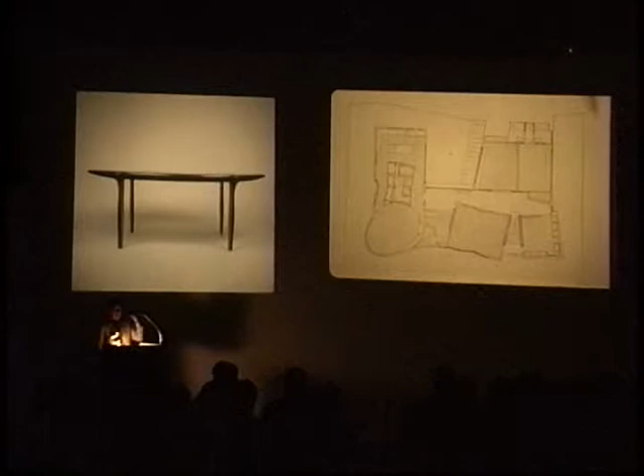All right, now this idea of seamlessness is something that we have also tested at the scale of a building. In this case, a house for a couple who wanted to retire in Bilbao, in Spain. And we have to thank Frank Gehry for allowing the clients to have a more open mind as to what a building should look like.

In this case, we played first with the idea of dissecting through the building, since we were against a hillside, and actually being able to occupy the top, the roof of the building. At the same time, all of the programs, again, because it was supposed to be a home for retiring, needed to be in a single floor plan.

And what you see on the right-hand side is the floor plan with basically all of the programs. The dining room, which is the oval-shaped room, needed to accommodate a 19th century oval-shaped table. The living room needed to orient itself towards views, and then the library needed to have a requirement for however many books they wanted.

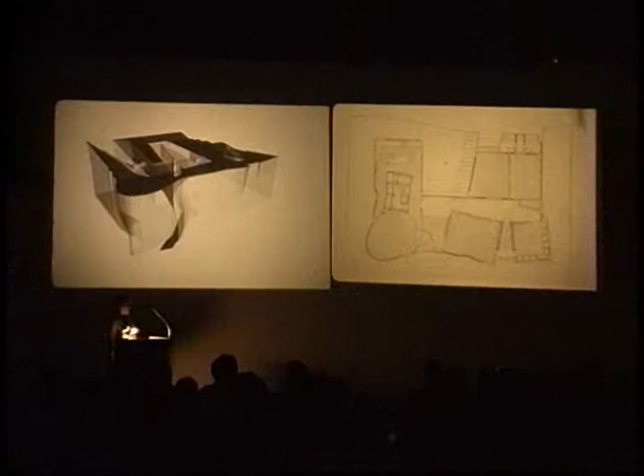So we took each of the requirements as excuses, again, to produce a figural plan that was not cohesive. And in fact, we like to argue that the plan can be read in many ways, as somehow being colliding within the plan.

Now, most importantly, each of these rooms seems to put pressure on the skin of the building, almost as if the building was shrink-wrapped around these rooms. So, for example, the moment in which you need to drain water and have access, a staircase to the roof, has a certain impact on the elevation.

And instead of wood, which is, of course, the sort of conventional, traditional technique, we began to work with laser-cut steel that would make up templates. It would make up shelves for the stone itself. So the jig that will guide the mason for the laying of the stone will become impregnated and embedded within the building.

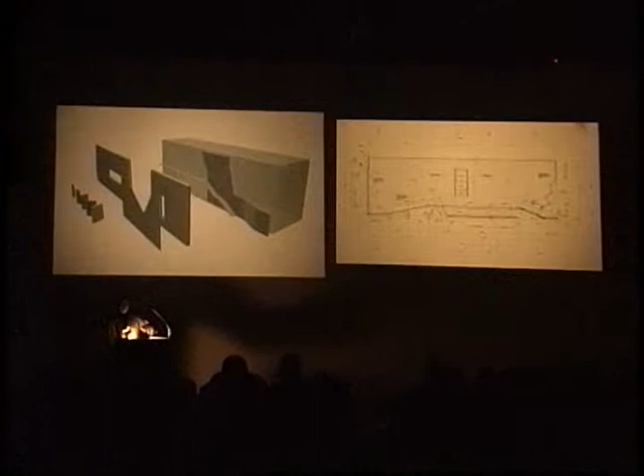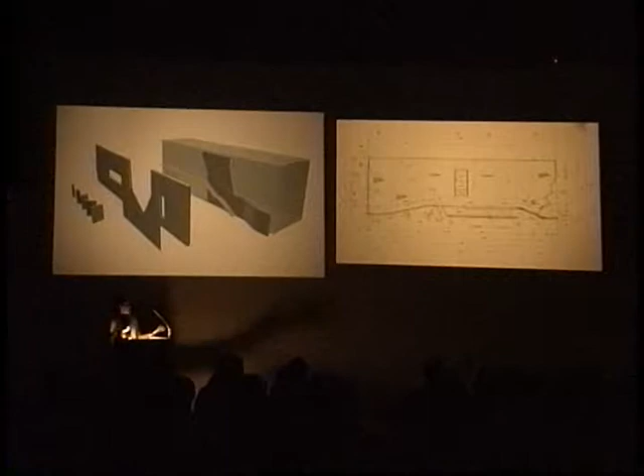For this particular project, we decided not to do the traditional thing that architects do with an end block. Instead of putting the stair on the party wall condition, since we had a very low budget and had to invest money on the staircase, we said, why don't we put the stair on the outside of the building? That way, you put all your eggs into one basket. So what you're looking at is a stair that connects a cafe and a gallery on the ground floor to art studios on the upper floor.

This idea of having the side of the building in an end block condition not behave like a side is nothing new. There are many buildings in cities that decide to treat the side as if it was yet a third front.

In our case, that third front, that staircase, became the moment where we could investigate the possibility of distorting the building. What you're looking at is a skin that somehow becomes imploded, like a sock inside out. It's not clear where the facade begins and where the facade ends.

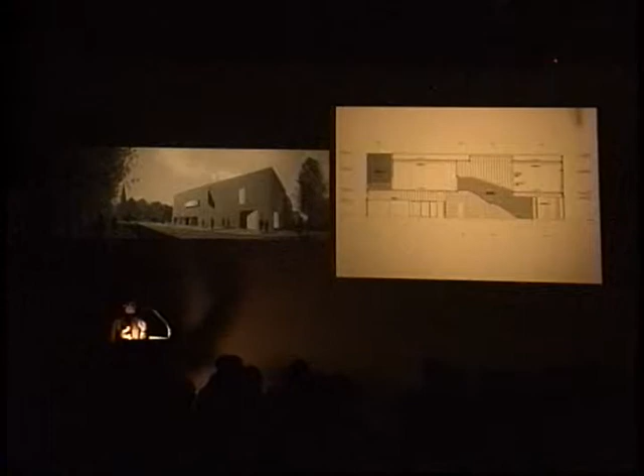At the same time, the stair becomes a directional device, so that as you go up, it points you towards an existing landmark, a church, but as you're going down, it frames the view of a public space, a public park.

This was a very low budget project, so the rest of the building had to be relatively simple. We decided to treat it almost like a warehouse, a two-slab project with a twist, using the excuse of bringing light to the gallery and the cafe to introduce two skylights that penetrated the building. But you also have to bring plumbing through the building up. So these two elements, interpenetrating from the top and from the bottom, became agents for activating the section, in a very modest way.

So the distortion in the elevation, again this moment of the sock turned inside out, was possible by accepting a very conventional method of fabrication, doing metal studs throughout the building, then adapting the metal studs to the moment of the staircase, to the moment of the opening.

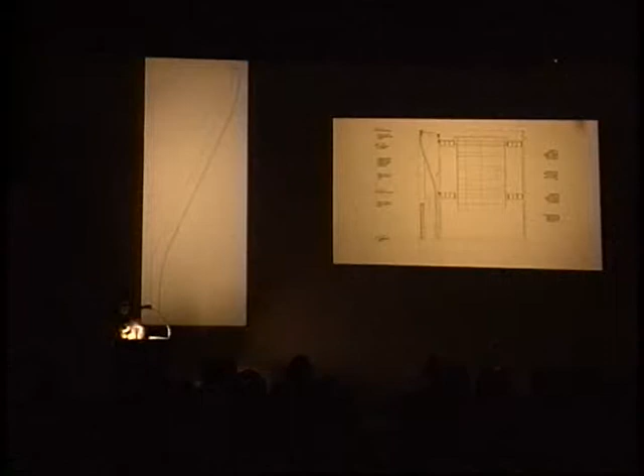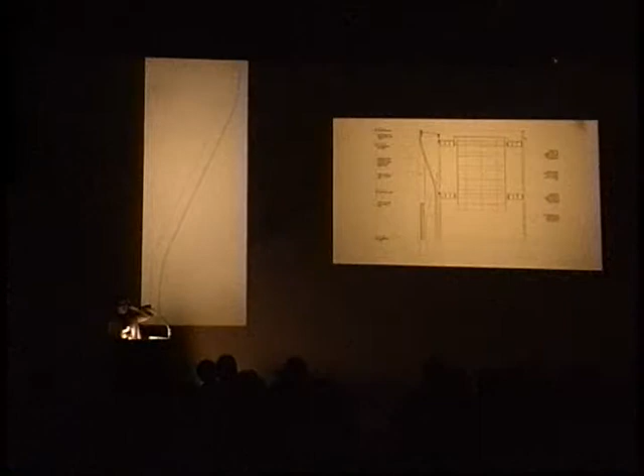What you can see on the left-hand side is actually laser-cut steel fins that get laser-cut with the impression of the brick itself, so that the structure becomes, again, the jig for the placing of the masonry.

We reduced the size of the opening several times to be able to bring it within budget, and we reduced it as much as possible before we would kill the idea. If I could change only the right-hand side—

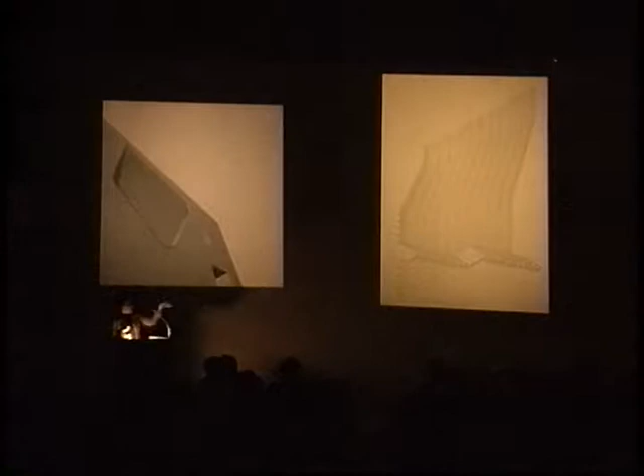Then you place steel angles every third brick, just like you do in conventional construction. Next slide, this is the wall with the brick already placed on top. Next, on the right-hand side.

For the rest of the building, we relied again on very conventional constructional techniques, but we worked with the idea of making the brick seem thinner or thicker, load-bearing or not load-bearing throughout, so that in the same corner you will have a fat wall and a skinny wall sitting on top of each other, so as not to favor one mode of construction or one reading of brick construction over another.

We did the same thing with the fenestration. We're purposely always trying to have as many techniques and as many interpretations overlaid on top of each other.

We got into a discussion in the office about the difference between shrink wrapping and vacuum packing, and I'm not sure that I know the difference still. There are different camps in the office as to what one means versus the other. But in general there's consensus that this is not shrink wrapping, that this is vacuum packing. As it's been explained to me, the difference is that one takes what would otherwise have been wasted space and sucks it out of the building as a means of gaining something else, as opposed to taking figures and then wrapping them with saran wrap.

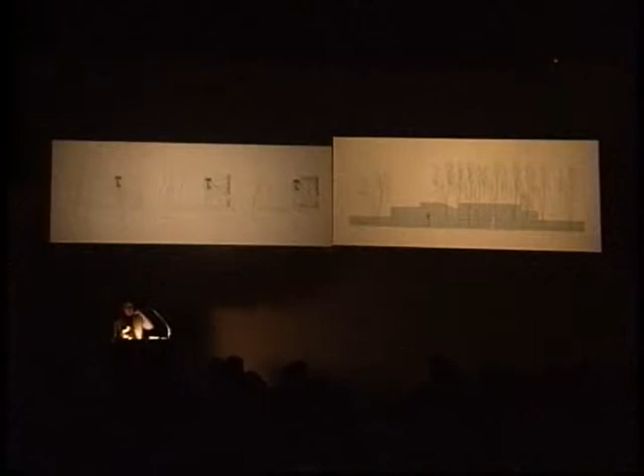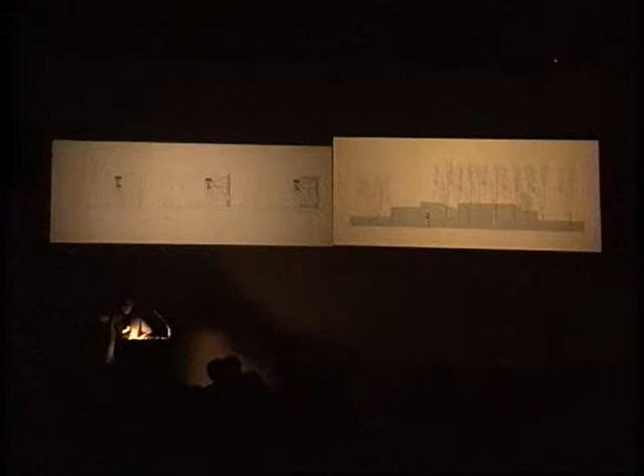Ultimately, the intention of the client is to actually build a series, to add more studios if the project is successful. The idea will be, again, that our building becomes the mothership for all of these studios.

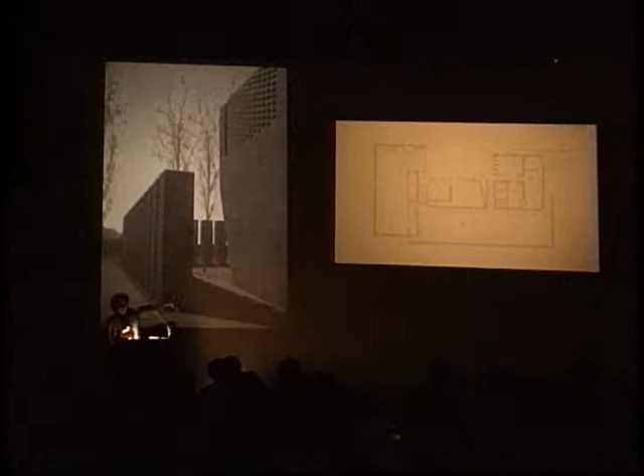I think probably you guys can't read anything in the plan, but we're looking at a long gallery on the left-hand side, and then two artist studios. One of the artist studios has a bedroom on the second floor, and the other artist studio has everything on the same level. On top of the artist studio that is on the ground, there is a caretaker's apartment, and this will become important later.

But in working with organizing the pieces of the project—gallery, two studios, caretaker—we became interested in producing a plan that could be understood as a single building that was chopped up, but also perhaps as three buildings that came together. In fact, the construction documents were drawn as if it was three separate entities, with some drawings that brought it together.

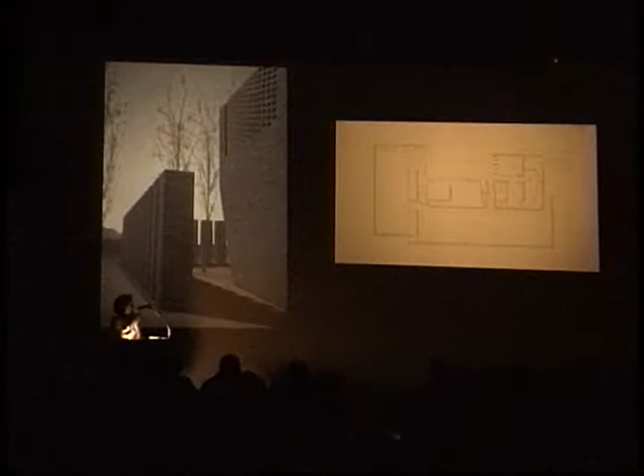Because of these slippages, or this compactness of the elements, the idea of pressing against the building and forcing you to go through the cracks of the building became the motivator for our interest into vacuum packing.

So, for example, as you go through the courtyard and slip into the gallery, the building has to move away in order to allow you to go into the gallery.

In all of these distortions, there was an incredible sort of pragmatic but absurd minimalism, where we would squeeze in any inch that we could in order to gain circulation. So, for example, this is the main access into the courtyard that views towards the forest of trees, and on the right-hand side you can see a stair that takes you to the caretaker's apartment.

You can see how we're distorting the wall as a means of being able to pass through and under the stair. Now, this ambiguity—was this a single building that got split apart, or is this a building where things come together? Could I have focused on the left-hand side? It also has very specific material repercussions.

So as you're going through this crack that connects one garden with the courtyard and the grid of trees, or the forest, we were interested in developing the two walls as if they had once been one, or developing the two walls as if they could one day be one.

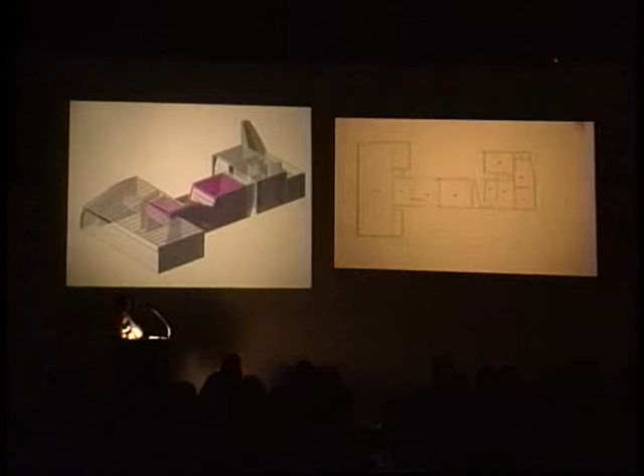On the second floor, we have a bedroom that belongs to one of the studios looking down into the gallery, and we have the caretaker's apartment. This interpenetration in section from one studio to the gallery, the double heights of the studios, there's an intertwining of staircases and volumes that have a relationship and a back and forth with what the envelope of the building is doing.

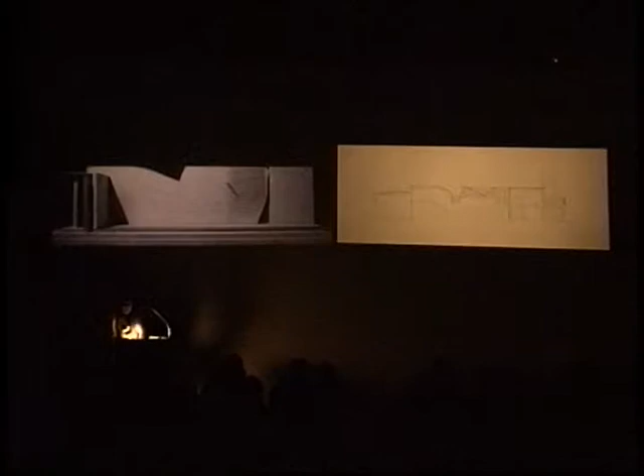So while the skin is trying to contend with passages and movements, the roof has to contend with shedding water, with bringing light into the art studios. And you can see how these things need to be negotiated.

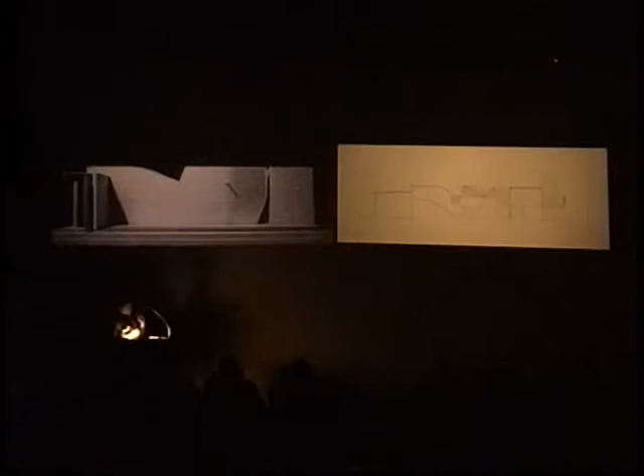So for example, on the slide on the right-hand side, you can see one roof dipping down over the staircase, whereas it dips down to allow light to go through the skylight, whereas the roof over the studio has to dip down in order to shed water.

And again, these moves for us had counterparts in the way that we dealt with the brick coursing itself. On the right-hand side, you can see the negotiation between shedding water of one roof and the light coming through.

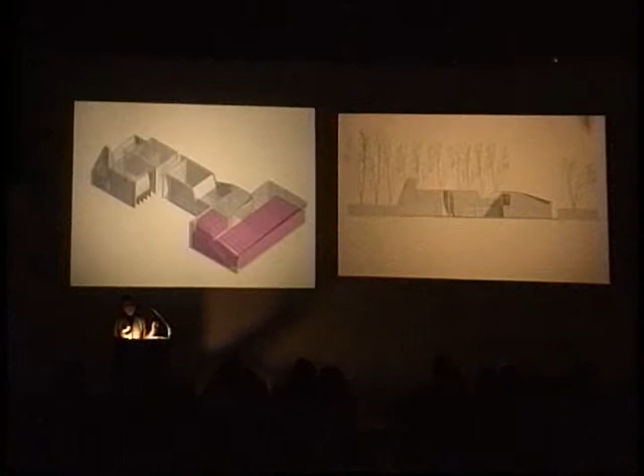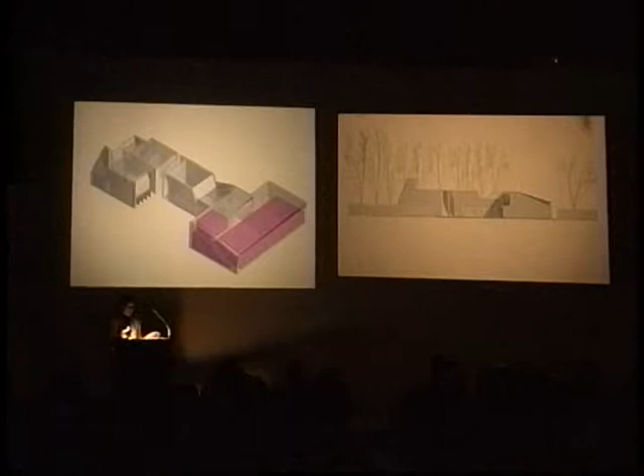The gallery is actually an interesting case study. There is a staircase that connects the gallery to an office on the second floor, which you can see in this diagram. But there is also the problem of bringing light into the gallery itself. So the roof of the gallery, which is at the far right of the elevation, dips down to shed water, and it gives the gallery almost its object quality.

But at the same time, the roof has to lift up in order to allow as much light as possible within the gallery itself. So this distortion also has to negotiate the intersection with the bedroom coming from the other side of the building, and that's what produces this sort of roof landscape.

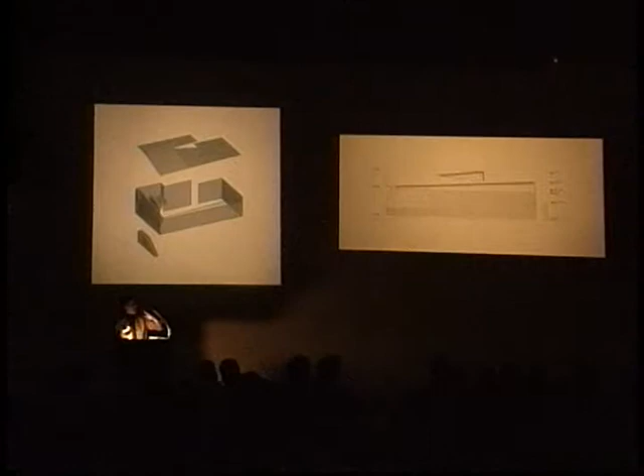Yet one more technique in which, instead of stretching the bricks as a way of accommodating for the vacuum packing, in this case, the bricks are compressed as a way of accommodating for the vacuum packing.

So the projects that I have shown until now negotiate the distinction, or lack thereof, between a program, its volume, and its skin. The projects that I'm going to show from now on focus on this idea of tolerance, whether one can actually negotiate the difference between structure, geometry, and a semi-perfect system, or a system that pretends to somehow be perfect.

We designed recently a restaurant in Boston, which its claim to fame is that everybody says it's New York that came to Boston. I don't know if that's good. I'm hoping after this summer we design another restaurant and they'll say LA came to Boston. It gives you a sense of design culture in Boston today.

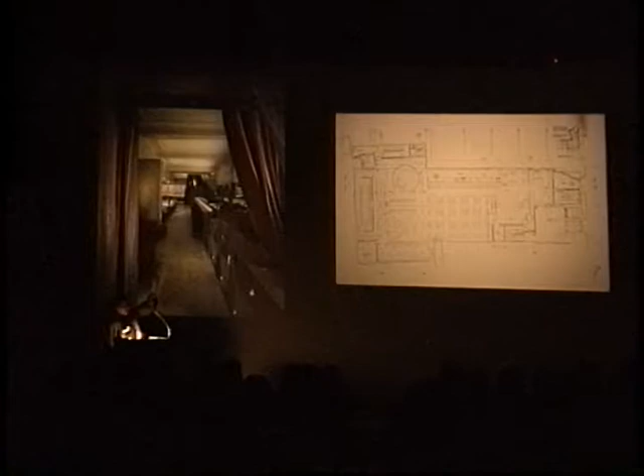One of the challenges of the space had to do with smoking laws in Boston and how we needed to design a screen area for smoking. So we designed this sort of object that will sit on the space. It's this rounded thing on the top of the plan, and this sort of weird brown thing at the end of this photograph. And the request was, can you design something that is a screen, but is visible, is porous, you can see through it, and so on.

So the object had to somehow sit on the space but not look foreign. It had to be intimate but somehow still visible, and it had to negotiate all of these mundane things that one does when one is doing restaurant or commercial design.

We thought one strategy would be to use a single size unit, meaning our bricks, which in this case aren't brick but are actually made out of plywood, would be the same tectonic unit. Why? Because it's cheap, economical, and easy to do. You tell the contractor: cut all of them the same size.

We thought of the sitting, of the back of a person, as a module to work with, so that the act of sitting around this place was registered within the structural system of the piece. What you're looking at on the right is an inverted worm's-eye axonometric of what we call the hookah den. Each of the facets represents the back of the seat, so couples that want to make out can sit body to body, and people that don't like each other too much sit more distant. We began to imply a certain sociology of the space.

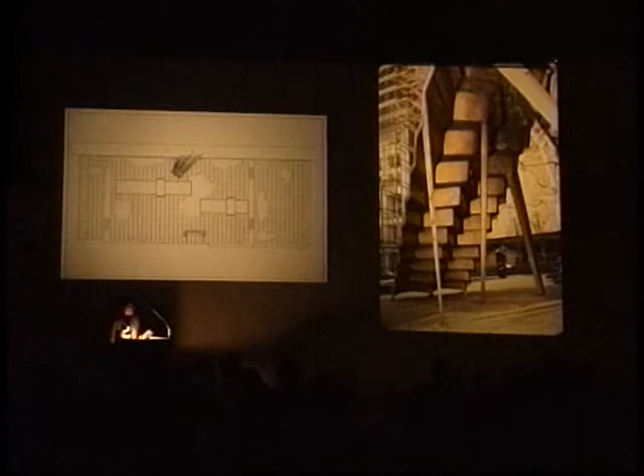We were asked by the Museum of Modern Art to participate in an exhibition, and several museums did the same thing at the same time—we were one of many participants. This is one of our earliest pieces. It's an old project, but I brought it in because it's a moment where the drawing becomes the actual thing, and because it's a project where we learned about the relationship between precision and tolerance. We were asked to do an installation in the garden of the museum. We decided to put it against the wall, partly because it produced a space underneath it, but also because it provided bleachers for sunbathing.

Could we raise the image on the right-hand side? I'm sorry, no, could you just raise it? Yeah. Sorry.

It allowed for sunbathing in the summer, and it became a billboard for the show on the street behind the museum. We worked with laser cutting techniques that allowed us to do a multiplicity of things. It allowed us, for example, to perforate the metal in gradations, so the bottom of the piece has less perforation and the top has more, which makes sense structurally—you want it light at the top, heavy at the bottom—but it also produces different effects as you move around it.

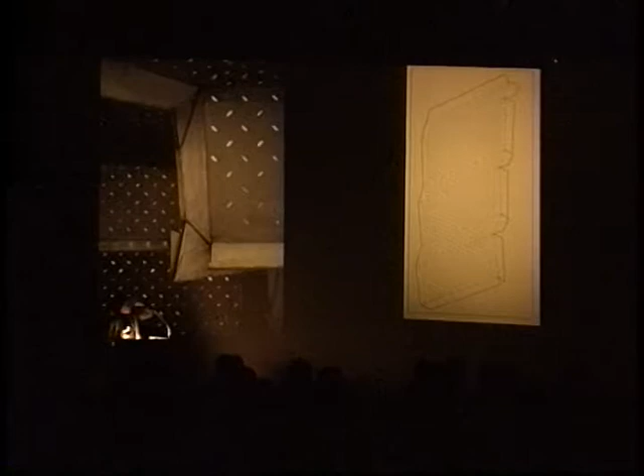We ended up making it with smaller bands because the fabricator had smaller steel at the factory that he could give us for free, and it was a very low budget project. So what you see on the right-hand side is one of the sheets that was laser cut, and on the left-hand side you can see the different joints created by wrapping one piece on top of the other—for example, you can see one folding and holding onto the next one.

We designed the piece so that as you moved around it, it changed dramatically in terms of its figure—becoming really thin on one end, becoming fat and distorted on another. From one point of view, the piece actually flattens and you lose the sense of its real dimension. This technique is related to anamorphosis, which from one point of view gives you a seemingly perfect figure, but as soon as you step out of that idyllic moment, you realize the figure was not perfect at all.

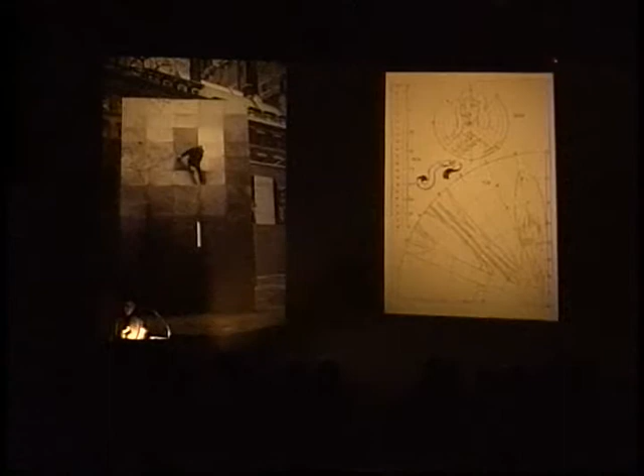More recently, we did a project, a competition entry for PS1 for the Urban Beach project. I don't know if you guys are familiar with this. We were asked by PS1 to submit a proposal for their courtyard. Generally what they do is give the courtyard to the community as a summer beach.

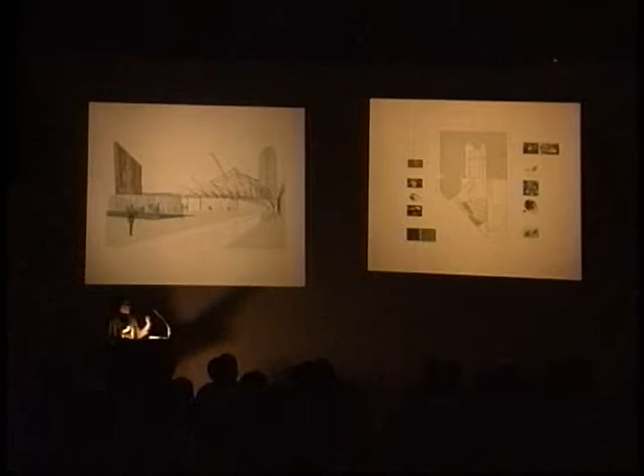Our proposal was to create a roof structure under which you had a bar, a water fountain, selling of fruits, and sort of chaos. On the other side, which is the rectangular shape next to the roof, we filled up a pit with sand.

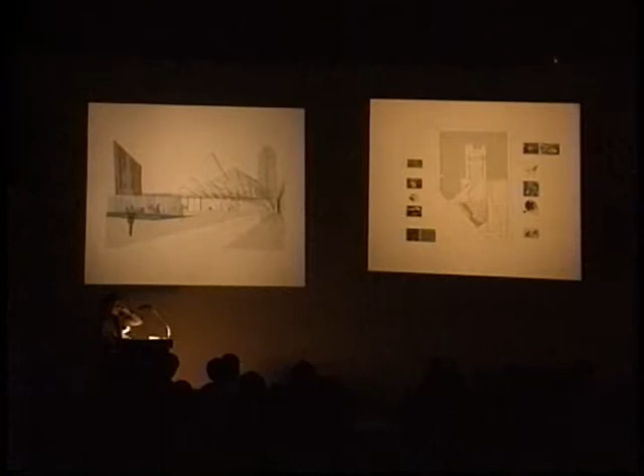So the pit with sand became a very straightforward project in which we filled up one corner more than the other. This became a way of framing the view of PS1 and looking back at PS1, and also a way of sunbathing, a nicer way rather than laying in a horizontal plane.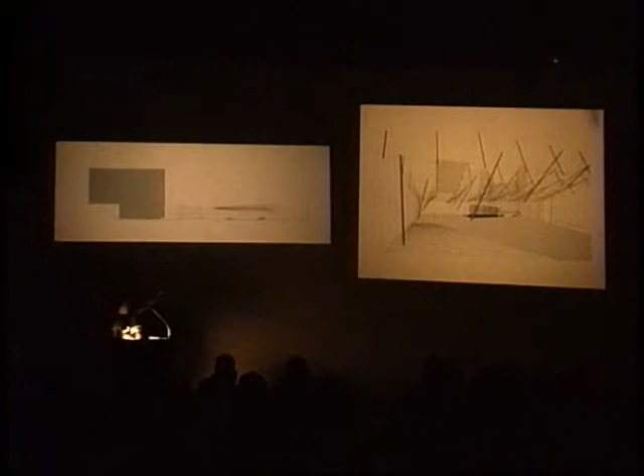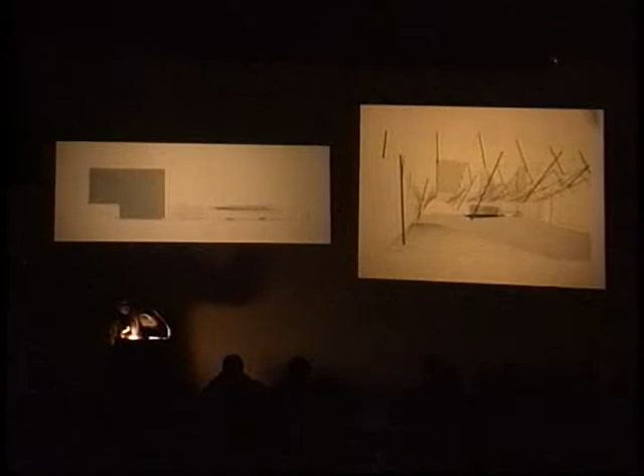Now, this canopy became sort of an all-encompassing roof, and we decided the program underneath should just take place. But at the same time, we thought it should be some sort of organizing device. We felt it should come down towards the entry, which is on the right-hand side, that box opening, and that it should become some sort of threshold.

So we started working with the idea of a Tensegrity structure, a structure with members in tension and members in compression, because the walls couldn't take a heavy structural load. If you do a Tensegrity structure, it stands on its own, has its own structural logic, and only the weight of the structure rests on the walls.

The problem with a Tensegrity structure is that you have to triangulate and do an offset grid. But at the same time, we wanted a lot of control over the grid, and we wanted it to begin to manipulate space as you move through.

The left-hand image is sort of a regular grid that then becomes offset - you can see the red dots and the black dots. Then on the right-hand side, you can see how the grid begins to become two layers: a series of compressive members on a top layer, and a series of compressive members on a bottom layer.

In this image, you begin to see how instead of just dropping them as two separate layers, which is normally done with Tensegrity structures, we decided to do a zipper structure. So from one side of the space to the other, and from back to front, the two layers came together in a zipper fashion.

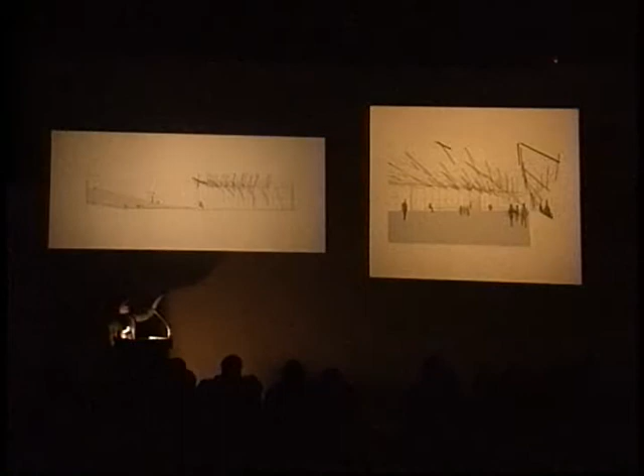From the right-hand side, from one side to the other, the canopy lifts up so that you can occupy it and sit underneath it, but also as a way of defining the bar area.

So we had two moments, two contradictory geometries: one that lifted from back to front, and one that lifted from side to side. The top tier responded to the back-to-front geometry, and the bottom tier responded to the side-to-side geometry.

What you're looking at in these diagrams is the top tier and the bottom tier in plan. One stick starts vertical and goes to horizontal, and another stick starts horizontal and goes to vertical. On the right-hand side, you get the grouping of both systems and the contradictions between them.

Now, each system in itself has a very specific, precise geometry. When you put them together, its precision is somehow diffuse, somehow lost, even though it's still obviously there.

Now, here was the dilemma. We really didn't want to do another Tensegrity structure - a high-tech cable with metal tube structure that we've already seen for over 40 years. But the structural engineer was telling us we actually have to do one because you cannot put the weight of this canopy on the wall.

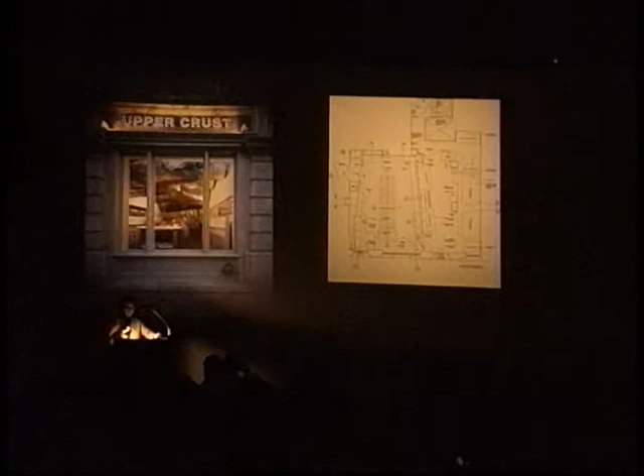So what we did was place a table in the center of the space for people who didn't want to take it home and wanted to eat right there. We concentrated on making very simple moves. Because it's a brand new place with no history, not a franchise, he wanted something that would immediately call attention to the space. So we started working with the idea of a wall that would become the billboard, announcing the presence of the establishment to the street—something that would shock you as you walk by, since the street is so conservative you'd never see anything like it.

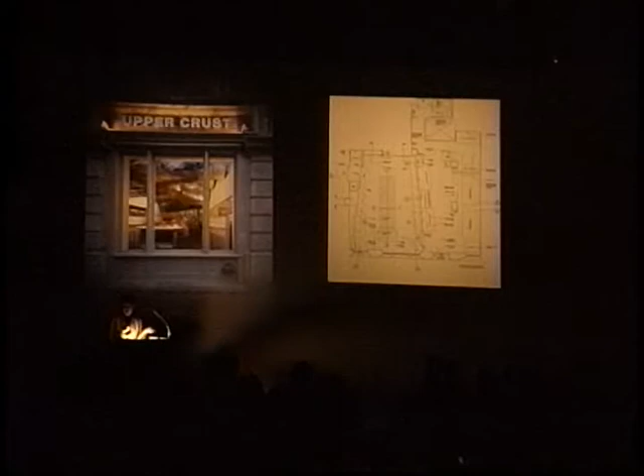If you could focus on the right-hand side—in truth, the idea of the wall actually came from the ceiling. We walked into the space and the ceiling was a mess. It had the junkiest mechanical system, servicing not only this space but the entire building, and the landlord made it very clear we could not move anything.

So we began working with a very rational system so it could be hung easily. The pattern you see was drawn on the ceiling to identify points for hanging, but it also responded to existing HVAC requirements. There are moments where we cut through the ceiling, as you can see in this view, to allow air supply, sprinklers, and all that paraphernalia to come through—and that determined the size of the geometry. As you move back, the openings needed to be bigger, so the diamonds are bigger; as you come forward, the openings needed to be smaller, so the diamonds are smaller.

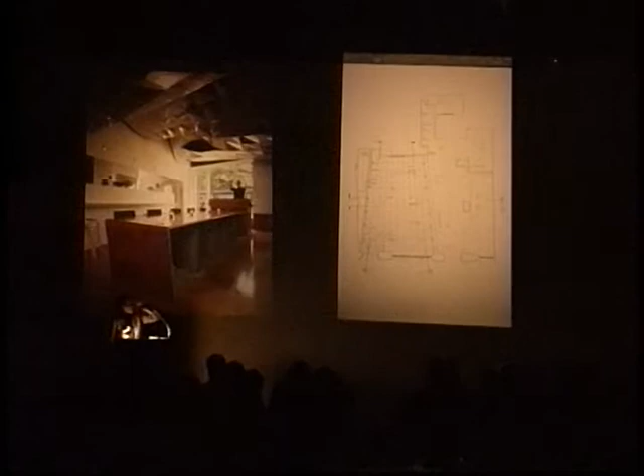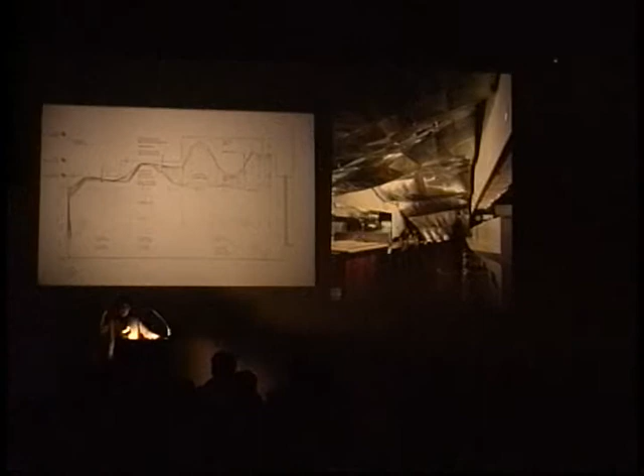So while the geometry in plan is very rational—allowing us to place the conventional metal hangers for the ceiling—the existing mechanical system did not allow us to do a simple geometry. There was a contradiction between the section and the plan. Whereas at the Museum of Modern Art we artificially constructed an idealized view, here the ceiling plan, the reflected plan—one you can never actually see but need for construction—had to be that artificially idealized view, responding to the existing soffits, the existing HVAC, and so on.

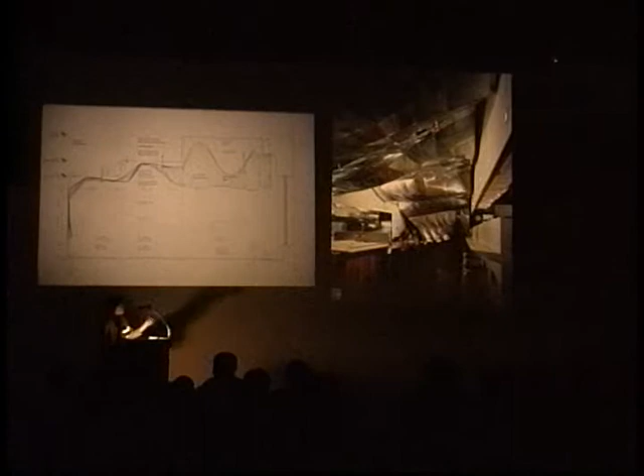Now, because of this contradiction between a plan view and what was three-dimensionally possible, we turned to clothing manufacturing and clothing design as a way of understanding how we could actually produce these pieces.

The pieces were made out of aluminum and they were laser cut, but their geometries were derived the same way a seamstress will derive a pattern. I'm only showing a few here so you can see—they're hung at 4 points, just like a conventional ceiling tile, and each of the shapes is completely different from each other. This is only possible because of laser cutting technology.

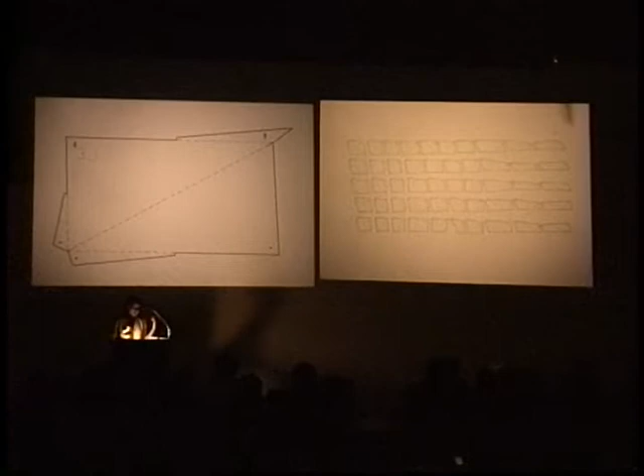So again, something that in a reflected ceiling plan may seem as if it was perfect, in its execution proves that it cannot be perfect, that it can only be but distorted. But ironically, it's precise in order to produce that imperfect effect.